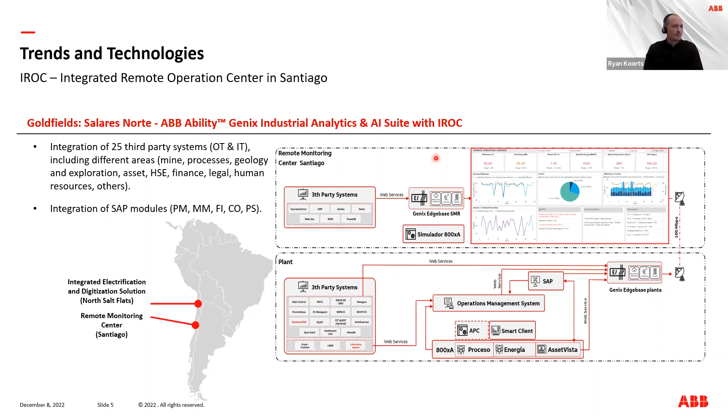So the Genix platform is integrating around 25 third-party systems from OT and IT, from the complete operation from mine to plant. So the Genix platform is allowing for better decision making on production planning and operations. Some examples would be real-time energy consumption forecasting and improving energy contract accuracy. So that's one example of a technology being applied currently.

Another example would be short interval control, and this is more related to brownfield, where short interval control is taking decisions in real time based on personnel and equipment availability and their status, and then reshuffling tasks in an optimum fashion based on live events.

So unlike the process plant, digitalization upstream in mining is fairly new or in an infancy type state. So here ABB is collaborating with customers such as Goldfields and South32 on ISA-95 framework with the aim to develop and implement interoperability standards for mine planning, mine scheduling, execution, so that the equipment and applications for mining operations more or less become plug and play. So slowly catching up to the control aspects of the plant. That's the second example of technologies and trends related to gold mining and processing.

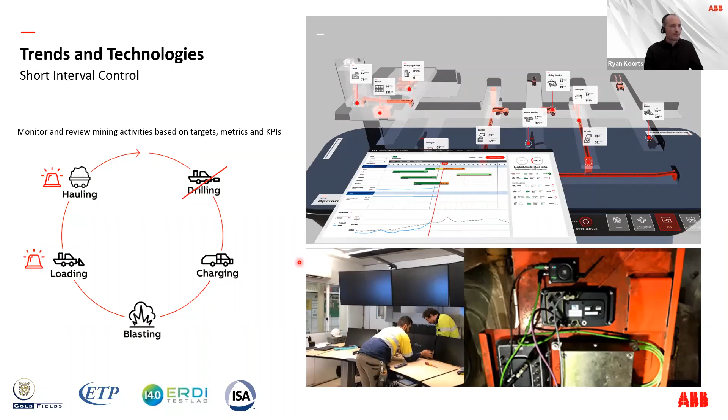I'll talk quickly about some other trends and technologies more related to sensing. Basically, a challenge in mining is measurements. So the ability to connect any new device, giving additional and new insights into how well the processing plant is performing, is critical for any progression towards autonomous mining.

Some examples here that I've pulled out: we have image analysis, and this can be either related to understanding particle size distribution around crushing and grinding, or through understanding the characteristics of flotation. So here we have image analysis on flotation, where we work with a partner that exposes frothing characteristics such as bubble size, bubble count, and velocity of your froth.

Another example of a partnership would be with MineSense, and they're more focused on XRF technology at the shovel, so understanding ore quality upstream before it reaches the concentrator, as well as belt sensors using XRF to understand, again, ore quality before it enters the mill. And then obviously with CyanoGuard, providing improved accuracy and frequency when it comes to understanding leaching conditions and obviously cyanide leaching qualities and quantities.

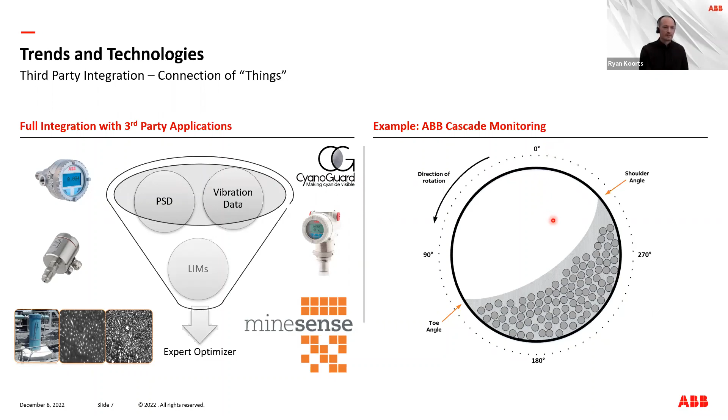With cascade monitoring, we use an off-the-shelf vibration sensor, which exposes the vibration spectrum around the mill shell and then transmits this wirelessly to the receiving base station, which runs ABB software that converts this vibration data into useful information, specifically around key milling features, and then exposes this via OPC UA to the process control system for consumption within Expert Optimizer.

So it's basically a wireless device that attaches to the mill via magnets. It's very small, small footprint in the plant, measuring the complete spectrum, like I mentioned.

When you compare it to acoustics, such as a microphone, which are only capturing one point, this is better suited to the complete spectrum of the mill, capturing more points, as well as the amplitude of strikes on liners. It's redundant, so there's 2 nodes per mill, battery powered, so in total around 9 months of continuous usage.

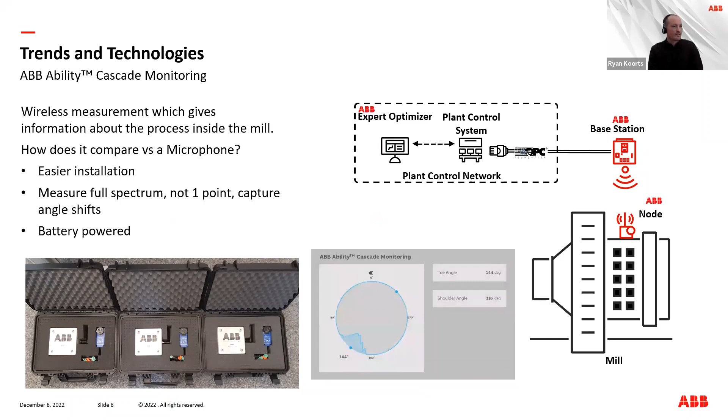So what exactly is ABB Ability Expert Optimizer? Let me quickly go over this. I like to refer to Expert Optimizer as a toolbox where there's a range of software technologies that allow an engineer to craft the best solution for that particular unit on the plant.

Some of the technologies I've picked out would be Model Predictive Control, or MPC, where MPC uses dynamic models obtained empirically from your process data, using historical states as well as the current state of the process to predict future values of key variables such as load or concentrate grade, and then how far away these future values are from either targets or constraints, and the control actions to drive them either closer to the target or closer to an operating constraint.

Another technology would be fuzzy logic, which has been around for decades, and this is more rule-based than data-driven.

Another technology would be the inferential modeling platform, which facilitates soft sensor and inferential models. This is useful for when you have infrequent values either sampled from a lab or an instrument that is unreliable and often going offline. With this, you have the ability to build robust estimation of particular states, such as density or particle size.

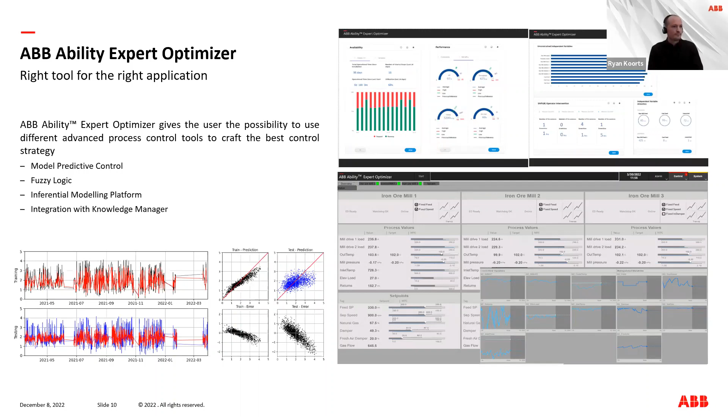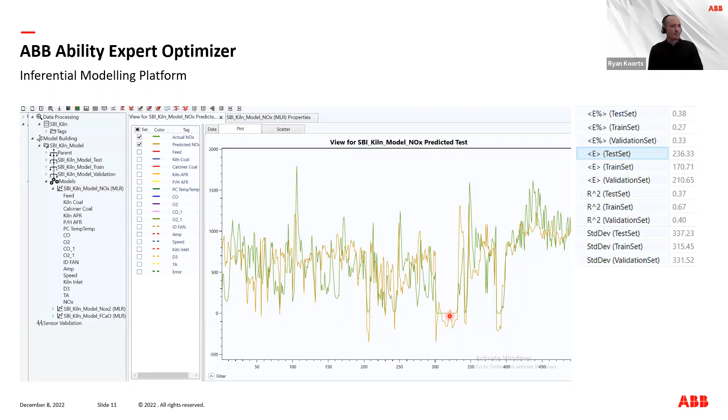As Walker mentioned, I'll mention a few use cases where this technology has been applied and the potential benefits realized. Within mining, ABB's been leveraging APC technology to improve mining operations from mine to port. If we look at underground, ventilation on demand using MPC technology to optimize underground airflows to reduce energy consumption.

Within the concentrator, improving grinding operations to maximize throughput and minimize energy consumption. With flotation, maximizing recovery while minimizing reagent dosaging. With thickening, stabilizing bed mass and underflow density for either downstream leaching or improving water recovery.

MPC has even been used in the marine ports industry, with piloting systems to help with collision avoidance. Here MPC is seen as a critical technology.

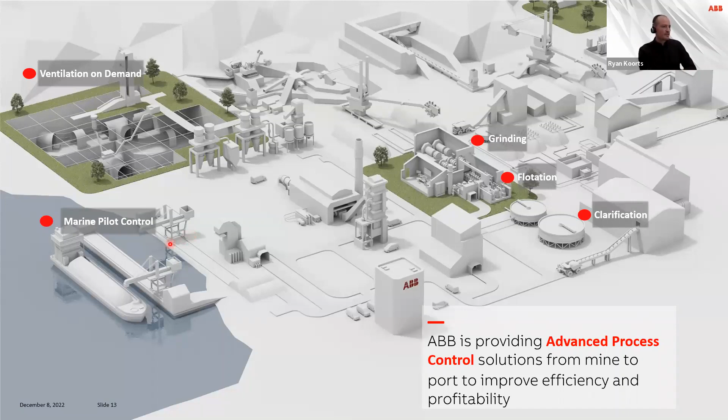For autonomous shipping. Okay, so quickly two examples of Expert Optimizer being applied on a concentrator at a plant in Sweden. Expert Optimizer taking over control of the fresh feed, the addition of water to the mill and sump, managing the speed of the mill, as well as the pump rate out of the sump to manage targets such as the power, load and torque levels, the density, and the cyclone pressures.

By doing so, through data-driven models and always looking at opportunities to maximize throughput and stabilize the process, some KPIs were achieved: increasing throughput by around 2.5%, whilst at the same time maximizing mineral liberation by 4.3%, and reducing specific energy by around 10%.

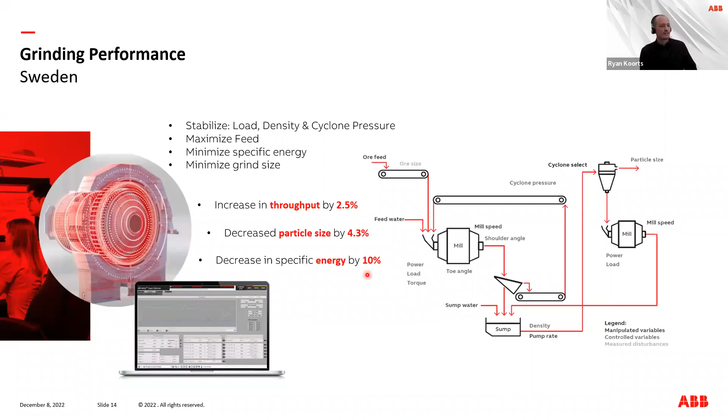Just to mention, I think these use cases are also published on the ABB website if you want to dive deeper, or contact me for more information, because I am going over it very quickly.

Another example with flotation applied on a different mine in Sweden. Here, Expert Optimizer took over control of managing the air level and reagents to always look at opportunities to drive concentrate grade to a lower limit, thereby increasing and maximizing recovery, as well as looking at any opportunities to minimize either xanthates, or I think it was also frother.

But overall, by minimizing variability and driving it to a lower limit for the concentrate grade, recovery was increased by just under 2%. This was a zinc plant. The one before was copper.

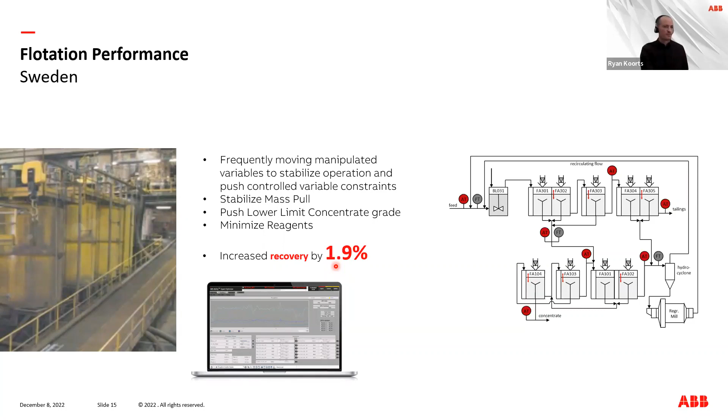Okay, so I'll hand over now to Luis to give a brief overview of CyanoGuard's leaching technology. Thank you very much, Ryan.

So we've talked about the importance of data, but it's also worth mentioning that this data needs to be reliable. This is where we, as CyanoGuard, provide reliable cyanide analysis for both free and weak cyanide, and at the same time, we provide digitalization of this data. That is the first step to properly manage and optimize your plant.

So first, I want to explain a little bit why we, as a technology company, are focusing on having a reliable analysis for cyanide. Cyanide is the most cost-effective solution today to leach gold from ore, even though cyanide has been used in the mining industry for more than a century.

Well, cyanide represents the highest consumable cost at the processing plants. On average it represents 6% of the total cost, or cash cost as some of you know this parameter, but it can go as high as 20% in some specific cases.

Also, cyanide has a direct influence on metal recovery and plant performance. So accurate measurement represents an important opportunity for gold mines to optimize their plant, because traditional methods such as silver nitrate titration or potentiometric analysis are not that reliable and have significant interferences with complex ore.

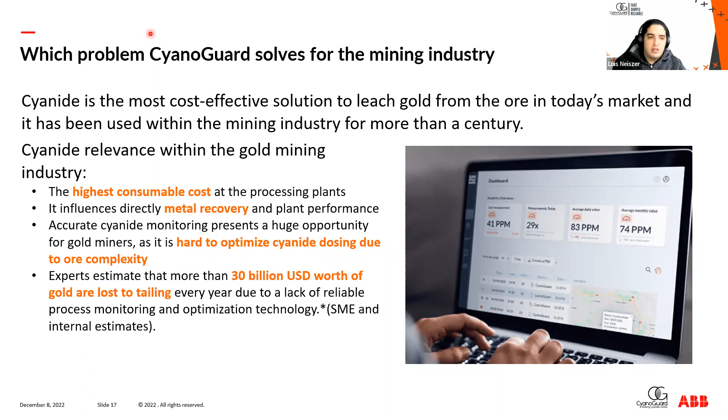This leads to underdosing or overdosing of cyanide in the leaching circuit. The estimation is that more than $30 billion worth of gold is lost every year due to a lack of proper, reliable process control and optimization technology. Next one, please.

So how do we do that? We have a patented solution that is unique in the market. Why? It's reliable. It shows no interferences, as our chemosensor has a high affinity and selectivity for cyanide. It doesn't have any interferences with other elements such as copper, silver, zinc, hypersaline matrices, thiosulfates, and thiocyanates.

It's fast. The solution procedure is performed in less than 2 minutes, and the results for both free and weak cyanide are shown in less than 30 seconds. And last but not least, it's simple. The procedure is not complicated at all. It's basically flushing the solution you want to analyze into our cartridges.

Once the sample is analyzed, the analyzer transmits the data in real time to our cloud platform. If needed, this data can be integrated into the current process control systems.

Our benefits have shown up to 15% reduction in cyanide consumption and up to 20% reduction in cyanide-associated costs, including detox reagent costs and pH control costs. So back to you, Ryan.

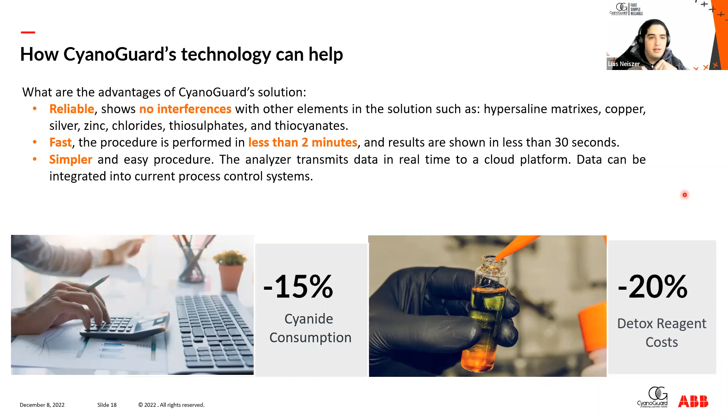Thanks, Luis. Okay, so I'll go over now some high-level design of how we are marrying these two technologies. So what we have here is the overview. So how do I explain this?

So at a higher frequency, what you have is Expert Optimizer on plants, consuming information from the pre-leach thickener, such as the thickener underflow density, bed level, bed mass, and torque turbidity. And this is, like I said, at a high frequency, so every 30 to 60 seconds.

And then understanding where these values are in relation to where they should be, and then taking corrective action through the data-driven models, which understand the long-term dynamics typical of thickeners, taking corrective actions on managing the thickener underflow pump, the flocculant dosing, and the management of water.

And then at a different frequency, a little bit slower, what you have is Expert Optimizer consuming information from the CyanoGuard cloud platform relating to the current cyanide dosing level, and again how far away this is from the target, as well as pH levels. And then again, making corrective actions by managing the dosing of cyanide and the dosing of lime to minimize this delta from target.

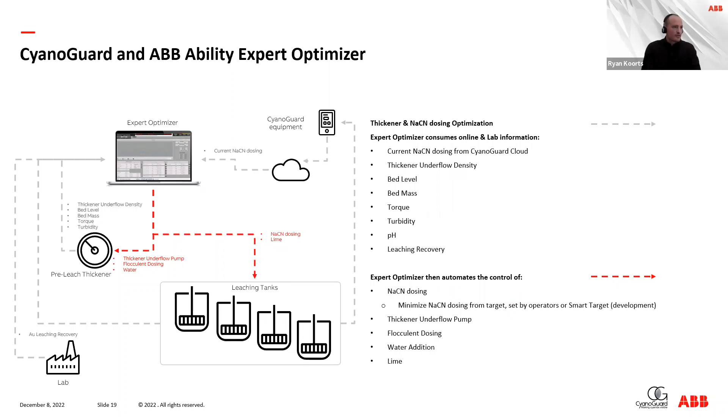And then by increasing the scope of what actually influences extractive recovery, like I mentioned, managing also the pre-leach thickener. So here we talk about reducing variability of what's leaving the thickener, reducing the variability around density, and shifting this density closer to where it should be.

And also the minor benefit of reducing any overdosing of flocculant, looking at opportunities to minimize cost within the pre-leach thickener. And also by minimizing variability in the bed mass and minimizing any violations of torque with the rake, you also have the possibility to reduce wear related to equipment.

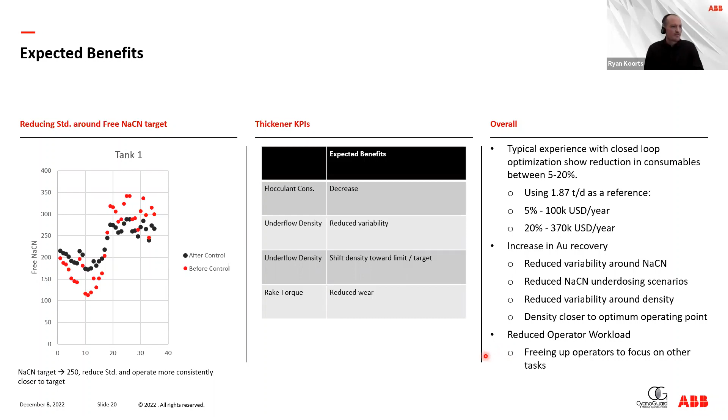So that's more or less from me. So I hand over now to Borka.

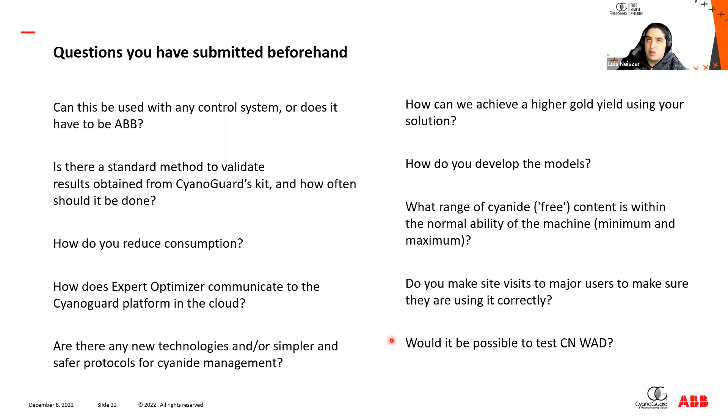I think we finished with the questions that were submitted beforehand. We have one question on the chat: what is the technology behind CyanoGuard?

I will take this. Basically, our solution works with this orange chemosensor, based on vitamin B12, which has high selectivity and high affinity to cyanide. Repeating again, this is a quite unique solution in the market because it shows no interferences with other metals in the solution. The chemosensor does the analysis, changes color, and the change of color is analyzed by our mobile analyzer. So overall, this is how the technology behind CyanoGuard works.

I don't see any other questions in the chat. If you have any more questions, feel free to ask them now. In case you missed something, you can always reach out to Ryan, Luis, or even to me, and we'll get back to you.